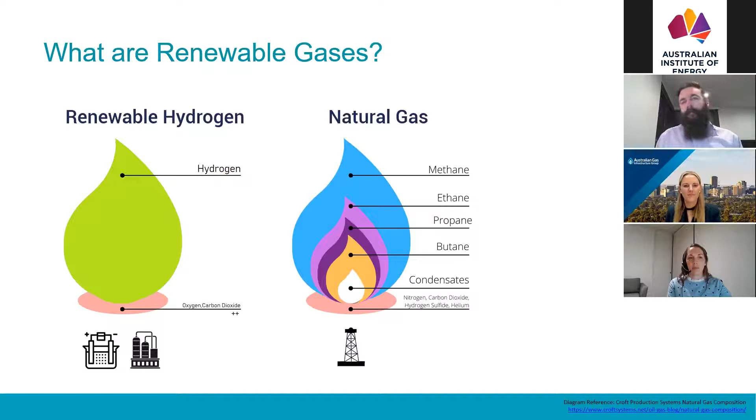The other approach to creating a renewable gas is to create a hydrocarbon where the source of the carbon has come from the atmosphere rather than from underneath the ground. That's where we have our renewable methane pathways, be they biomethane, where plants draw carbon from the atmosphere and get processed into methane, or through a synthetic process where CO2 is absorbed from the atmosphere and combined with hydrogen to create methane.

Either way, we're keeping the CO2 in the short carbon cycle, hence it's considered carbon neutral from a Scope 1 emissions perspective. Interestingly, you can actually create each of these from the other. Through reforming renewable methane, you can create renewable hydrogen, and through combining renewable hydrogen with renewably sourced CO2, you can create renewable methane, which is really handy.

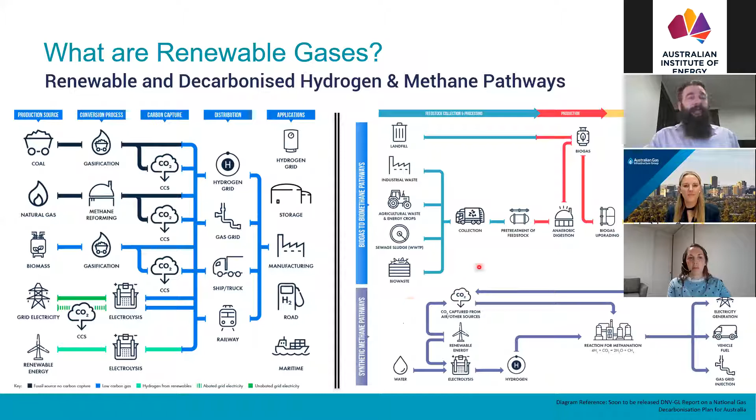Whereas on the right-hand side, we have our various biological processes feeding into forms of processing that wind up in a form of methane, or our synthetic process of creating hydrogen, combining it with CO2 captured from the atmosphere, methanation, and we have methane. Now, I'm not going to dwell on these slides, and I'm hoping the slide pack will make it to everyone so you can have a look at your own leisure.

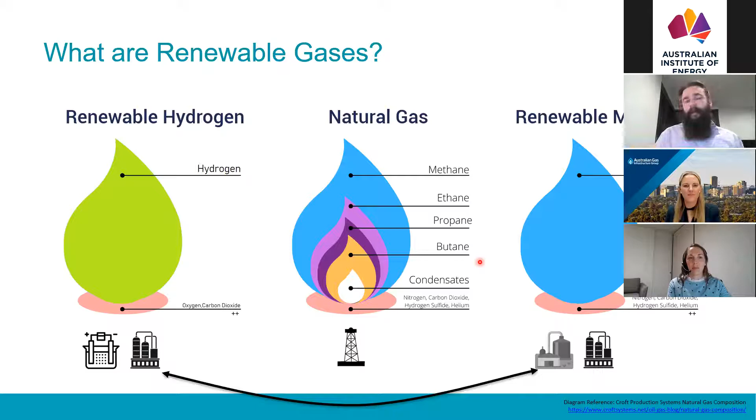But ultimately, what we get at the end of the day is two flammable, combustible gases that we can use as a fuel that don't have carbon emissions. And that's really, really useful. The more interesting question, though, is why are renewable gases important? And this is what gets me really passionate.

So I'm going to start this conversation with a really monumental feat that we've been able to achieve in Australia. And that's that in 2020, we were able to achieve 24% renewable electricity generation as a percentage of total generation in Australia. And that's a really, really monumental feat.

Australians should be really proud about being able to achieve that 24% level. And it's a testament to the effort that's been put in over the last decade or two to really drive the development of the renewable electricity industry.

But importantly, electricity isn't the only piece of the puzzle. This is data from the Australian Energy Statistics demonstrating the various different forms of energy used or consumed by Australians. Now, this is just domestic consumption. If we were to add exports to this, we'd add another 15,000 odd petajoules on top. But just looking at domestic energy consumption, only 19% of energy in Australia is used as electricity.

22% of energy in Australia is used as gaseous energy. 52% liquid fuels, 3% direct use of coal, funnily enough, and there is a 4% direct use of renewables, which are actually predominantly biological in nature.

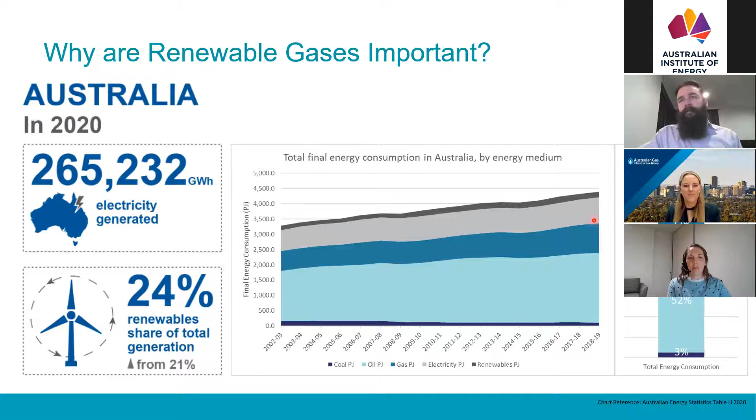But the important thing to recognize here is just how big this stack is to solve, and the fact that this 24% we've been able to achieve is only 24% of this. Now, to me, that's a little bit scary, because that means we need to essentially do what we've done over the last couple of decades 20 odd more times to solve the entire problem of decarbonising all energy use in Australia.

Now, sure, that's based on current energy demand, and with transitioning to electrical appliances, we're going to have electricity efficiencies involved. But even if those efficiencies halve the amount of energy, that's 10 times more than what we've already achieved, just being solved by the renewable electricity sector.

The question that leads me to ask, though, is what if renewable electricity didn't have to solve the entire problem alone? What if other forms of renewable energy, be they solid, liquid, or gaseous, could also help solve this problem? Now, of course, I'm the gas guy, so I'm going to talk about renewable gases, not the renewable solids or renewable liquids. But renewable gases give us an opportunity to have another way of solving this problem.

But thinking about how we solve this problem with renewable gases, we need to stop thinking about gas as just a fuel and think about it as an energy medium, molecules as an energy medium. To do that, I'll take you through a relatively simple description of the basic energy medium model for solid, liquid, gaseous, and electrical energy. Because no matter what the medium, all four of these types of energy have essentially the same structure.

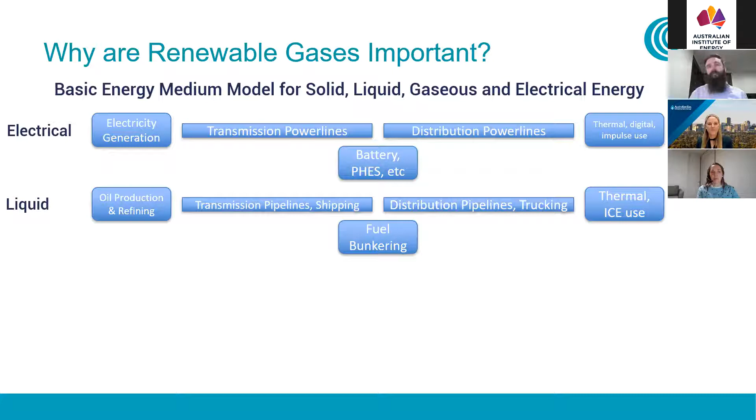This is also relatively familiar for liquid fuels, with oil production and refining, transmission pipelines and shipping of fuels, fuel bunkering, mostly around ports. In some countries, distribution pipelines. In Australia, distribution trucking, and thermal and internal combustion use at the end of the day.

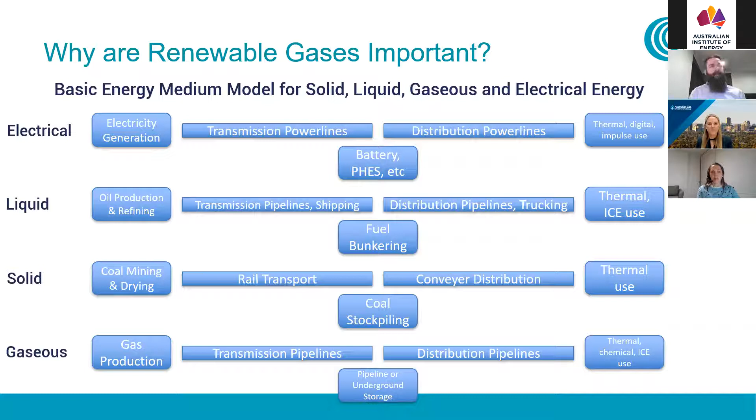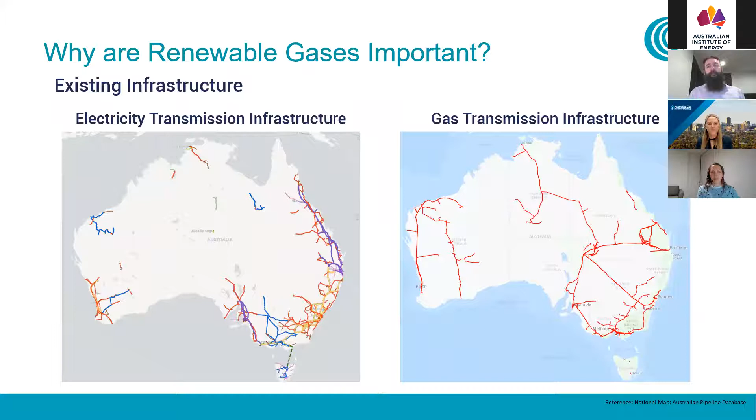Despite the price increases that we have seen in gas over the years, current gas prices, be it wholesale or retail, are lower than electricity prices. And we expect this to continue. Future gaseous energy infrastructure, even for hydrogen infrastructure, is still expected to cost less than electricity infrastructure for the same volumes of energy being transported.

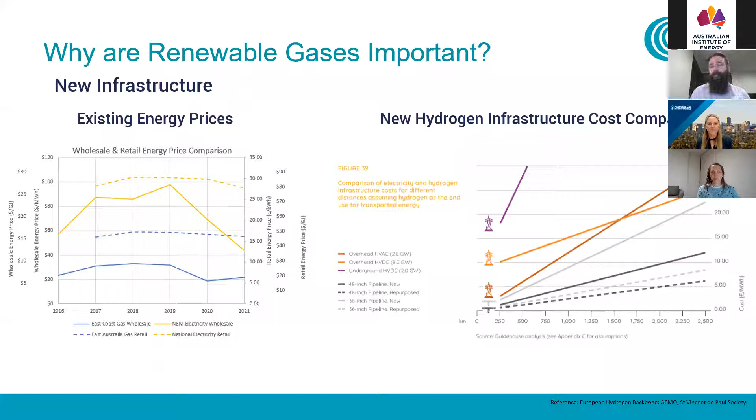Now, this data is specifically from the European Hydrogen Backbone Initiative. Encourage anyone to go have a look at that. But importantly, though, that is relative to Europe. APGA is in the process of undertaking its own research to consider this relationship in an Australian context, considering Australian conditions. And from historical experience, we expect a very similar outcome, and we'll make that available for everyone once we finish off the research.

Understanding that gaseous energy is already cheaper and the infrastructure is going to stay cheaper, it's not really super surprising that when we analyse the net cost of gas decarbonisation, we find that decarbonising gas demand is cheaper through green hydrogen than it is through electrification. And this is a really important point. We can decarbonise gas use through electrification, but we're finding through analysis that it's cheaper to do it even through green hydrogen.

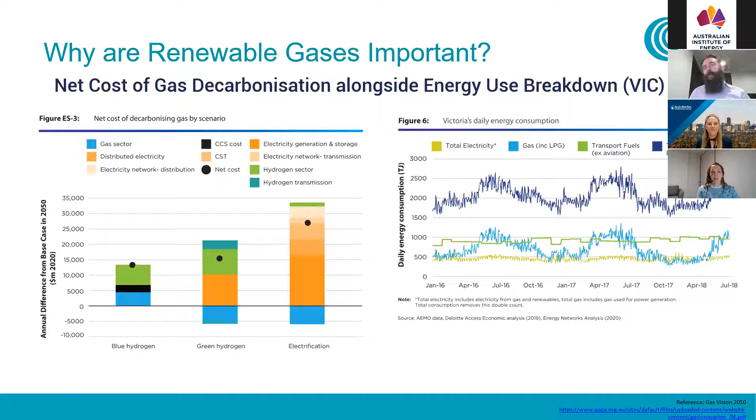That's a really important point when you consider just how much gaseous energy we use, especially in a place like Victoria, where Victoria uses 27% of end-use energy being from gaseous sources relative to 17% electrical. You'll notice the big swings between winter and summer energy demand are predominantly absorbed by gaseous energy as well. To decarbonize this large energy demand, it makes sense to focus on the lowest cost option, considering there is so much energy demand in this particular form.

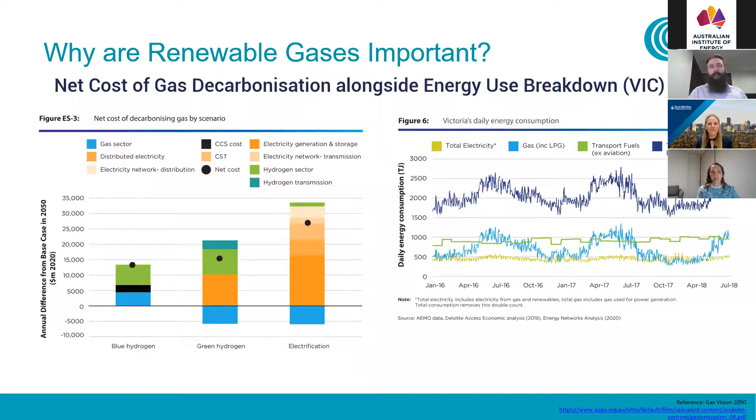When we look at the wholesale cost of energy in retail energy costs around Australia, the wholesale cost of gas is currently less than half of pretty much everywhere. Now, considering that we're expecting the wholesale cost of renewable gases to be possibly double the wholesale cost of natural gas, that sounds scary in itself. But when you compare it to the cost of wholesale electricity in a retail energy breakdown sense, you're still only coming up to the current cost of retail electricity, and wholesale electricity is expected to increase as well.

The Grattan Institute expects wholesale electricity to reach $100 per megawatt hour in a net zero emissions NEM, not let alone a fully renewable NEM. So on a wholesale energy cost basis, looking at how that impacts household and business energy prices, you're actually not taking that much of a step up by doubling your wholesale gas cost.

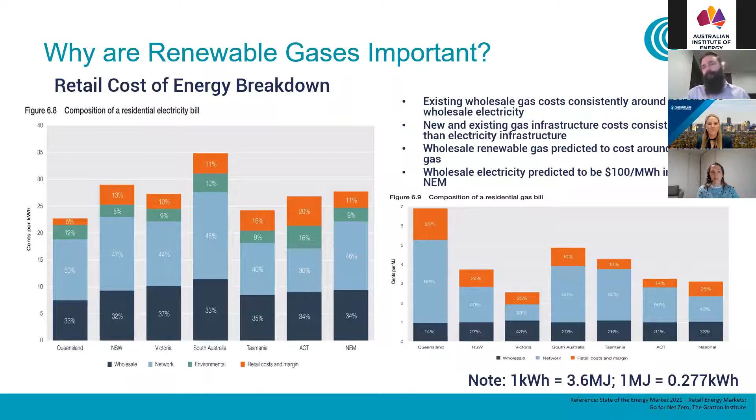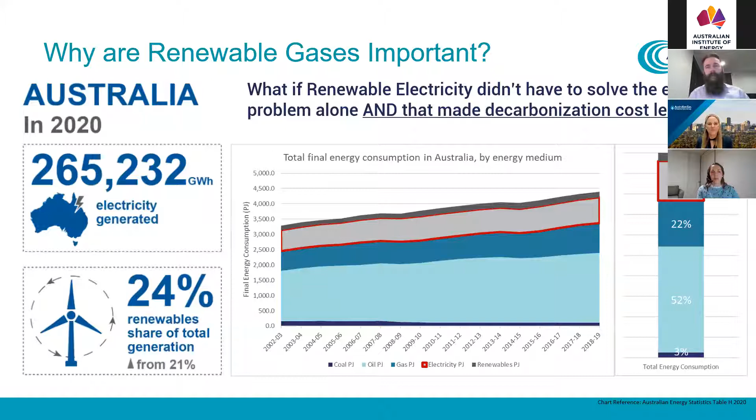That kind of changes the question. The question is no longer what if renewable electricity didn't have to solve the entire problem alone, but what if renewable electricity didn't have to solve the entire problem alone, and that made decarbonisation cost less? That really is why I'm so passionate about renewable gases. We're talking about an opportunity to achieve the decarbonisation we're looking for as a nation, but to do it in a way that utilises more than just one set of technologies, utilising two sets of technologies side by side in unison to solve the problem in the least cost way possible.

I think that's really important for Australia and how we move the entire nation forward on a decarbonisation pathway. That's about all I had.

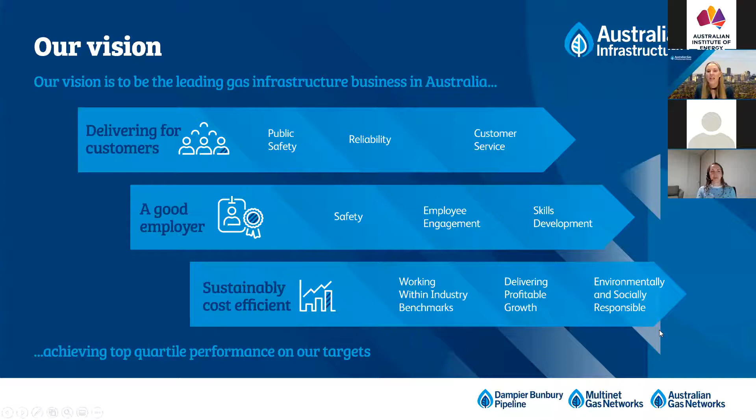What we hear from our customers is that they like gas, especially for cooking and hot water. Many industries rely on it. They also like the reliability - on average, our distribution customers have an unplanned outage once every 40 years or so, which is quite good compared to electricity. That's not because electricity aren't doing a good job - our assets are just underground, it's the nature of it, we're not as susceptible to storms and aspects like that.

Also, our customers understand the need to decarbonise. They understand that it needs to happen, that it should happen. They understand it might cost a bit more, but they don't want it to cost any more than it has to. They want it delivered at the lowest possible price. So that's what we hear from our customers.

The other interesting aspect is customers just know they get gas. Everyone on this call will know that gas is methane, but on average, the customer doesn't realise what sort of gas they're getting - it's just gas to them. I heard an interesting story from one of our sister companies in the UK. He went up to one of their customers and said, do you have gas in your home? They said yes. Do you know what sort of gas it is? Yes, it's natural gas. Yeah, but do you know what sort of gas? No. Do you know it's hydrogen? No, I didn't know that. It's not hydrogen, of course, it's methane, but the basis of that is just people don't really know. They just expect to get gaseous energy, the flame, safely and reliably, and that's what we deliver them.

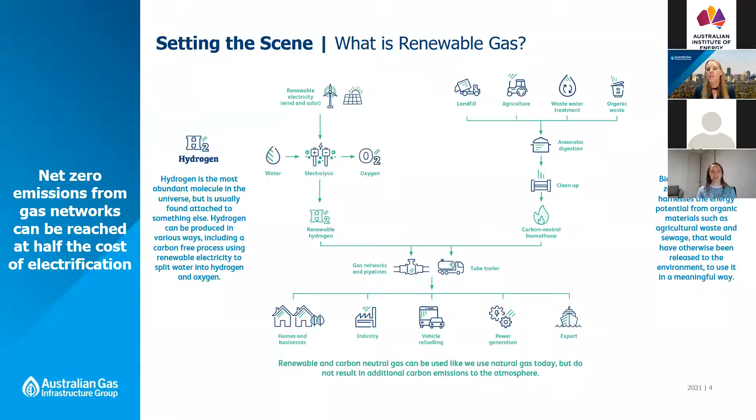So what are we doing as industry, and what are we doing as a business specifically at AGIG? I'll start a few years ago in 2017, when all of industry came together, which was really an important step to show unity, where we said, there is a pathway for renewable gas. You understand renewable electricity, understand there is a pathway forward with renewable gas, and we're going to get on with delivering it. We're not going to wait for government policy.

In the next 5 years, we're going to start biogas and hydrogen demonstration projects, and then we're going to start to deliver meaningful decarbonisation and network conversion. So that was in 2017, and obviously work from industry started a while before that. Whilst these timelines are quite broad, they were really important to starting the conversation.

And I'm really proud that following on from that, Australian Gas Infrastructure Group has come out with our own low carbon vision and strategy. What we're committing to is 10% renewable gas across all of our networks by 2030, and 100% conversion by 2040 as our stretch target, but certainly by no later than 2050.

Most states and territories now have decarbonisation targets of 2050, or a couple by 2045, and we certainly want to achieve renewable gas before that. So this is our targets: 100% by 2040, and that's renewable hydrogen and biomethane.

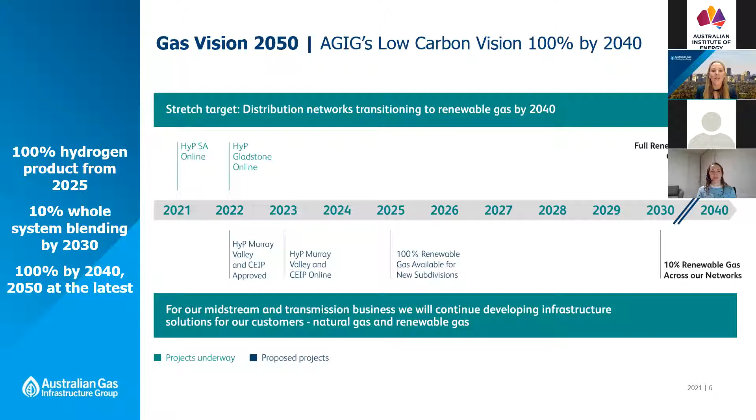A few things I won't get into in detail today, but I'll mention we are doing, or have just recently completed, a feasibility study into blending hydrogen into a large transmission pipeline, the Dampier to Bunbury pipeline in Western Australia. We have also established the Australian Hydrogen Centre, with the support of ARENA and the state governments in South Australia and Victoria, and also support from industry partners like AusNet, Neoen and ENGIE. That virtual centre is doing feasibility studies into 10% and 100% blending across South Australia and Victoria.

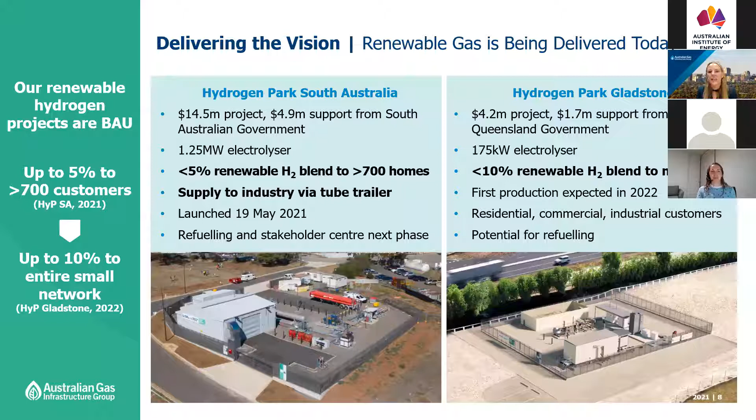We're already on to the next one, which is Hydrogen Park Gladstone, that received funding from the Queensland Government. That will be the next step in our journey. It will do up to a 10% blend. So HyP SA was 5%. We're now doing a 10% blend to the entire network of Gladstone, which has residential and business customers in it. So again, you can see the next step up there, which brings me to our next projects.

Which are the 10 megawatt projects that were recently funded by ARENA in May. And these would do, again, up to 10%. You can see there, HyP Murray Valley, that's going to deliver up to a 10% renewable hydrogen blend to more than 40,000 customers in Albury Wodonga. So again, you can see the step up there.

It was 5% to over 700 residential customers at HyP SA. We've then done up to 10% to residential and business customers in Gladstone, and then Murray Valley will deliver up to 10% to 40,000 connections in those regional towns. So it's pretty exciting, and you can see there that we're on our way to that 10% across our networks, and that these will deliver those learnings.

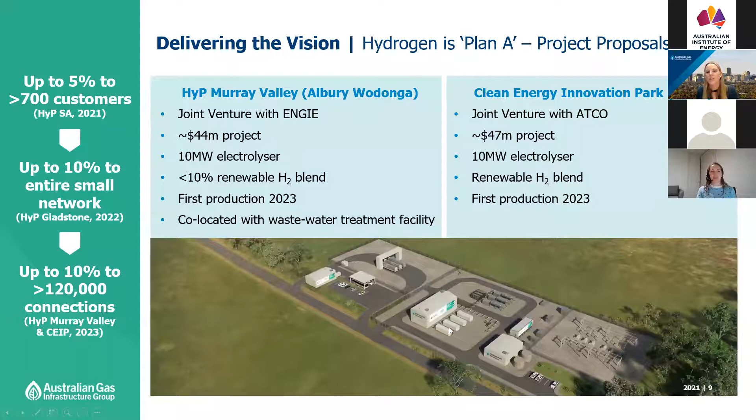So getting back to customers, because at the end of the day, that's the most important aspect of what we're delivering. And what it means for us is that we can work with customers to deliver them renewable gas solutions, and they want them. They want to know that they can decarbonise their gas, as I mentioned before. So these molecules are in the networks today. Customers can essentially do nothing and we'll do the hard work. As I said, we're targeting 10% across our networks by 2030 and 100% by 2040.

We know that renewable gas certification is happening as we speak, in that the federal government is working towards that. Gemini are doing some good work. We're talking to people about how we can use HyP SA as a demonstration and a testbed facility for these schemes. So just as you could buy certified renewable electricity today, in the future you'll be able to do that, which means you could essentially decarbonise all of your gas supply quicker than even our targets of 100% by 2040.

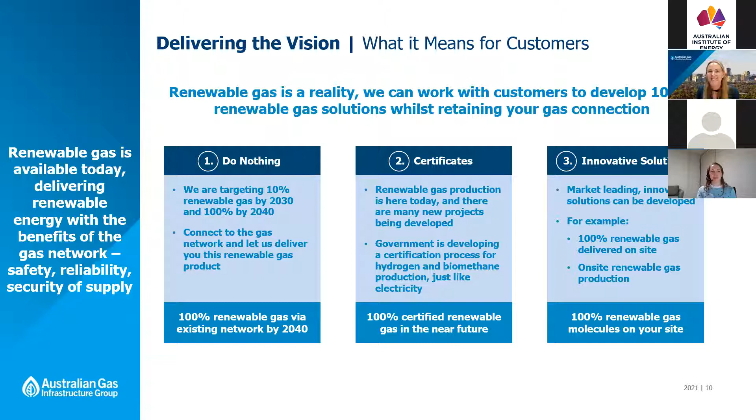And then, of course, there's the innovative solutions. So working with customers to deliver an innovative 100% solution just for them. And one thing I didn't mention was that on our low carbon strategy, we are actually targeting having a 100% renewable gas product by 2025, which is quite something given the way the years are flying by at the moment.

And ultimately, what we want to deliver and what we think is important for keeping prices low, for keeping energy delivery reliable, is an integrated energy solution. So better use and more renewable electricity, because there's a new market for it, and that market is electrolyzers, which can ramp up and ramp down.

We can also integrate with wastewater treatment facilities, and that's indeed what we're doing at HyP Murray Valley, which is co-located with wastewater treatment plants. So we'll look to sell them oxygen, use their water, and they're considering biomethane production. So again, you can see the sectors coming together, and ultimately what that will deliver is lowest cost decarbonisation for customers, and as well, hopefully some jobs and growth.

So at HyP SA, you were able to see that whilst our main priority was decarbonising domestic energy use in homes, we were also able to decarbonise industry through that contract with BOC.

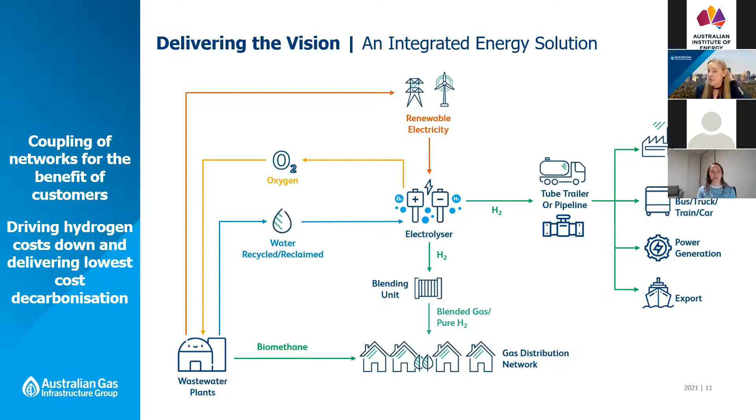So there are other use cases for this hydrogen, which using it in the domestic homes and business sector really helps to underpin.

So that's about it. The main message here is that gas is changing for good. And customers at the moment don't really need to do anything. We're doing some of the heavy lifting, and it's really important that we do that to drive down costs.

So the 10% blend will help drive down those costs of hydrogen and even biomethane, to demonstrate them, to socialise them. Ultimately, we're targeting cost parity with natural gas, H2 under 2 by 2030. Then we can start to sectionalise and decarbonise all of our networks as we target 100% renewable gas by 2040. Importantly, that's aligned with what our customers are telling us they want. They like gas, they like the reliability, they like the flame, they know they need to decarbonise, and they want that delivered at the lowest cost.

This is not the future. The future is here now. These molecules are being produced as we speak, probably down at HyP SA, and it's only going to increase. There are many more projects.

I'm going to do a gas joke and just imagine that at the other end of the computer screen, everyone's laughing. There are many more of these projects in the pipeline, and we've got a clear vision for the future of how we're going to deliver it.

The nice thing about this industry is that we're all working together at the moment. I speak to Jemena, we're working with ATCO on a project. People understand the need to drive this industry, and we're all working together to do it. So it's a pretty nice time to be involved, and a pretty exciting time as we turn ourselves into a decarbonised gas industry.

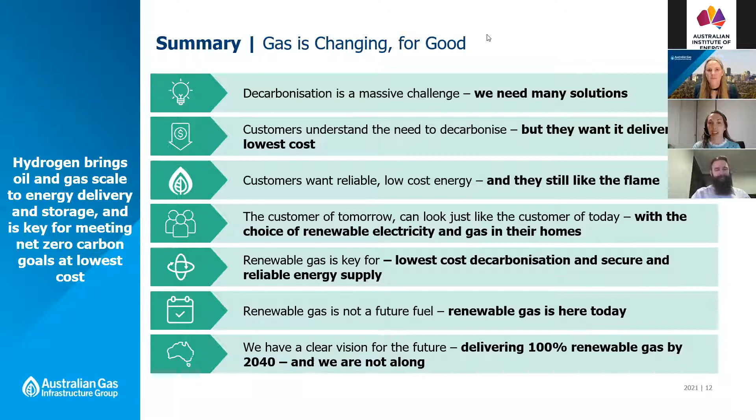Thanks, Chrissy. That was a really insightful presentation. Really exciting to hear about some of the projects that are already in operation, and many to come in the next 5 to 10 years. So it's really already on us, the renewable gas time.